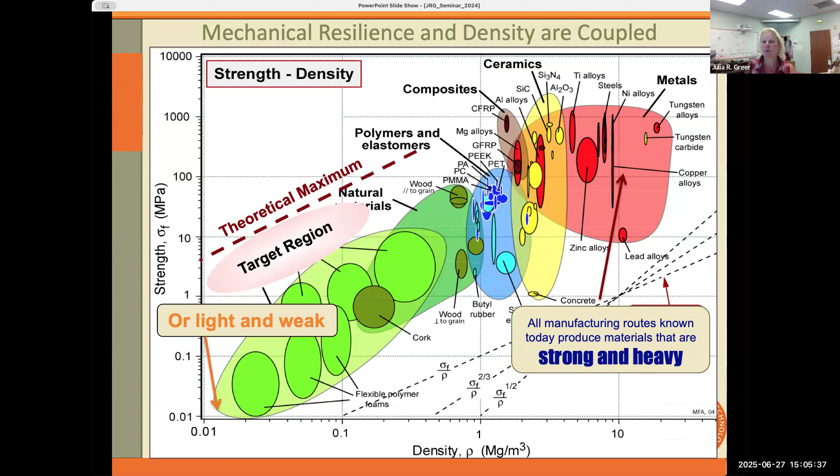Now, this is a log-log plot, so even a small change or small advancement within the space already represents a substantial change. So how do we get into that white space if everything we know how to make today is already represented here in these colorful domains?

What that tells us is that by properly structuring or architecting our material, we can get away with the same mechanical resilience without using quite as much material. And so this is where we started our research—I can't believe this was about 15 years ago now.

So it was the world's lightest material for about 3 weeks until the graphene aerogel guys blew us out of the water.

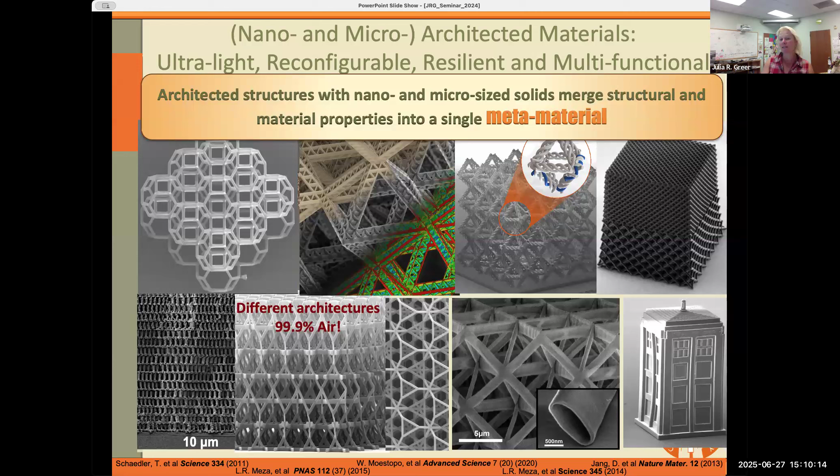So these materials embody every length scale from some nanometers to some hundreds of nanometers to microns, and maybe eventually to the macro scale. Because of that coupling at the nanoscale between the mechanics and the material properties, we call these metamaterials, because their properties can no longer be described fully by the mechanics perspective or the materials perspective.

What this plot shows us is that in their single crystalline form, all metals become stronger when you reduce their dimensions down to about 100 nanometers. So that tells us that gold or copper, something we know to be very malleable, becomes as strong as steel when you reduce their dimensions to the submicron level.

Now when I said in their single crystalline form, I don't mean that they don't contain any defects, I don't mean that they're pristine. What I mean is that they don't contain any grain boundaries. And now we have this power law scaling - of course, this is a log-log plot, right?

Now the size effect is more nuanced than that. If you look at the same metals like nickel, platinum, etc., and now you deposit them using a different technique - for example CVD or PVD or any kind of sputtering - in their thin film form, now they contain grain boundaries. And all of a sudden this effect is reversed, and now what you can see is that smaller is weaker. It's a more modest size effect - it's not plotted on a log-log plot, but it's non-negligible.

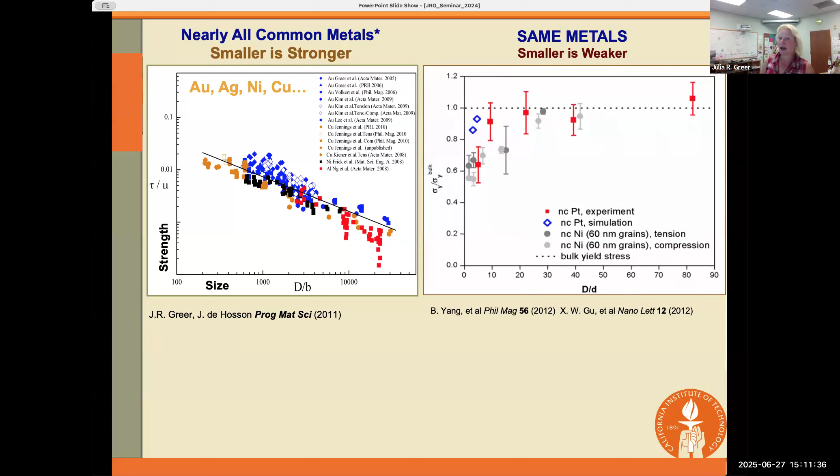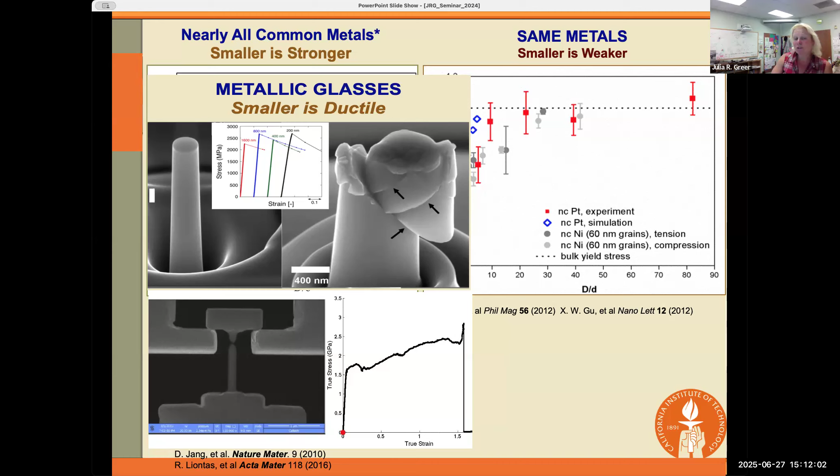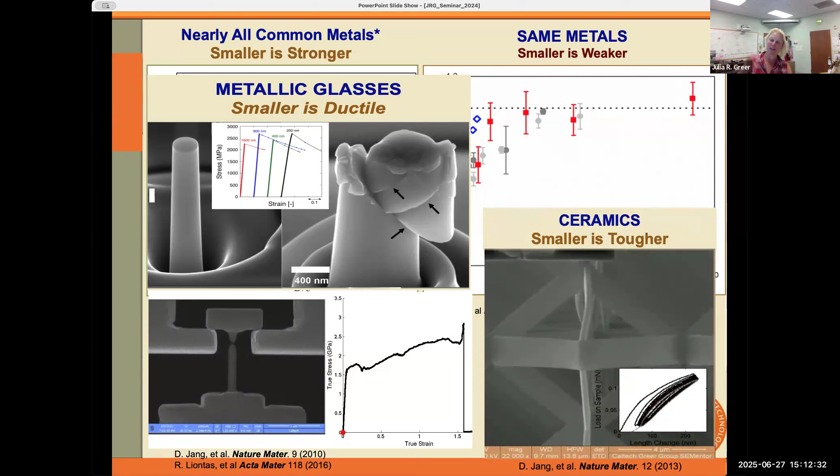If you were to calculate the tensile stress component within that beam, it's 1.7 gigapascals. Ceramics are not supposed to stay intact when they're being tensed with that much stress. So what this is teaching us is that sometimes materials can get stronger, sometimes they can get weaker, sometimes you can suppress brittle failure.

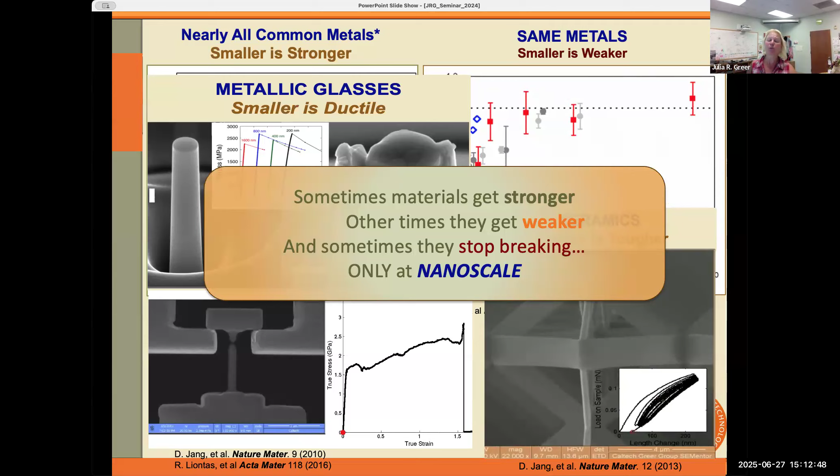But all of these phenomena occur only at the nanoscale. So the big question in our group was, can we harness all of these beneficial properties and then proliferate them onto larger materials with larger dimensions? For that, we are utilizing this concept of architecture.

The way we would proliferate these size effects is by utilizing three-dimensional lithography. This particular form of 3D printing or additive manufacturing is called two-photon lithography. The idea is that in a single laser pulse, there are exactly two photons released, and the constructive interference provides sufficient power to cross-link a photosensitive resin within a small volume, which we call a voxel. This voxel is rastered in three-dimensional space without a mask or any kind of light-based interference pattern, so that we can write a nano version of each one of you without any alignment or mask.

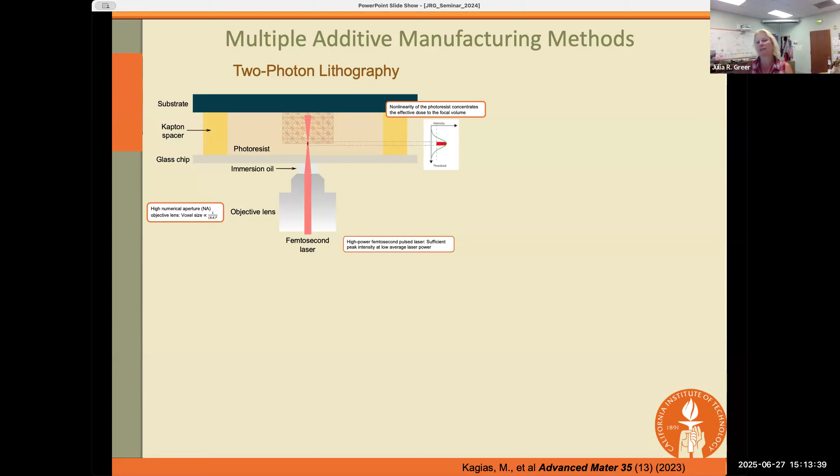So this technique allows for scalability and fast production of nano-architected materials, but you can no longer write arbitrary shapes. You can already see this trade-off: in the two-photon lithography world, complexity comes for free, but it takes some time.

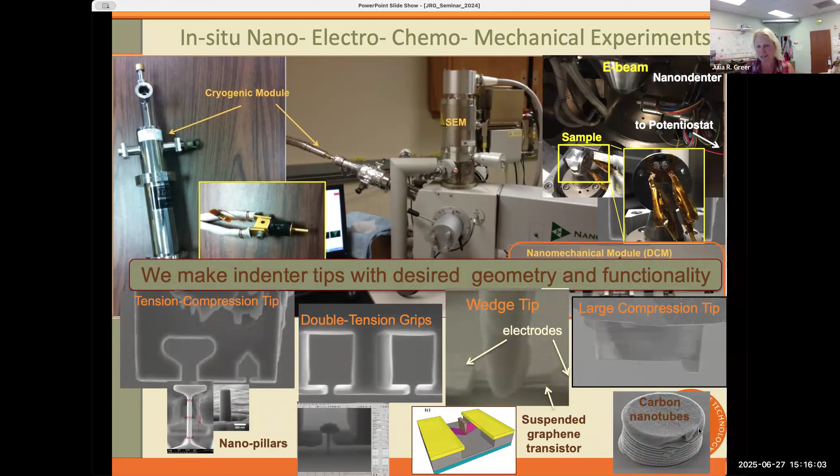Just to show you the broad range of length scales that we're able to probe: this sample, for example, is 100 nanometers in diameter, and we make our own grips that can pluck them while measuring the stress-strain response. These are carbon nanotube forests that can span hundreds of microns. So there's quite a bit of range that we can access and probe.

So let's get back to our hypothesis: can we utilize the size effect and proliferate it into materials with larger dimensions by utilizing this concept of architecture?

What I'm showing you here is an octet nanolattice made entirely out of alumina. Many of you are familiar with ALD, atomic layer deposition. When we talk to our friends who are the ALD experts, they said we can deposit conformally anything you want as long as it's alumina. So here's the alumina nanolattice. The wall thickness here is 50 nanometers, and it's very brittle—most of us know that alumina is a type of ceramic, and it's very brittle.

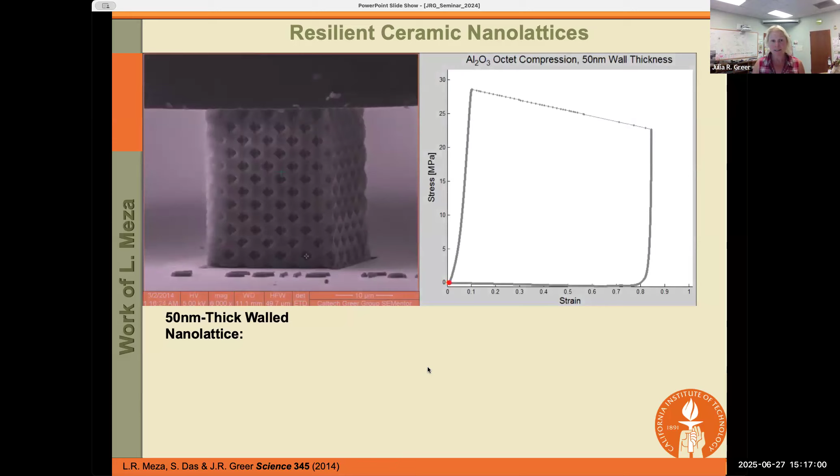Now its relative density is something like 1%, maybe less than 1%. So it's mostly air—think of your coffee mug with a severe case of osteoporosis. We know that when we apply pressure to something very porous and very brittle, it's going to collapse and certainly not recover. We have a nanoindenter in our instrument, and that's exactly what we're observing. So it crushes and dies.

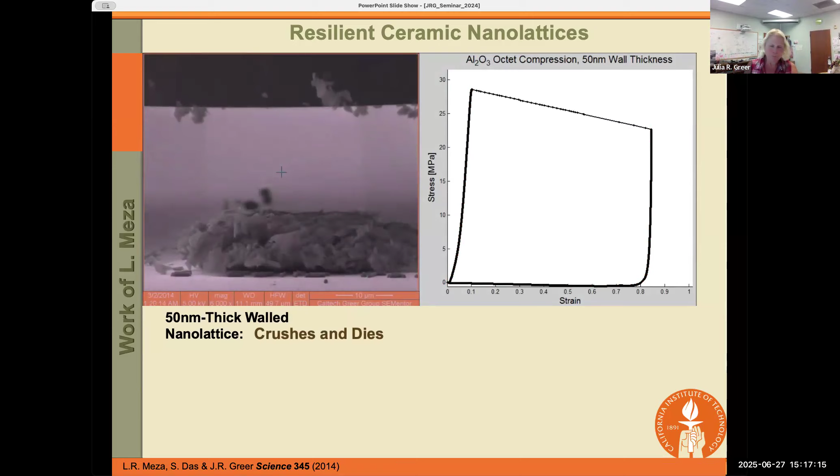Part of being at Caltech is that we don't really give up, so our student is pretty resilient as well. This is the work of my former student, Lucas, who repeated this experiment. But now the only difference is that the wall thickness is reduced by a factor of 5—so now these walls are not 50 nanometers thick, but 10 nanometers thick.

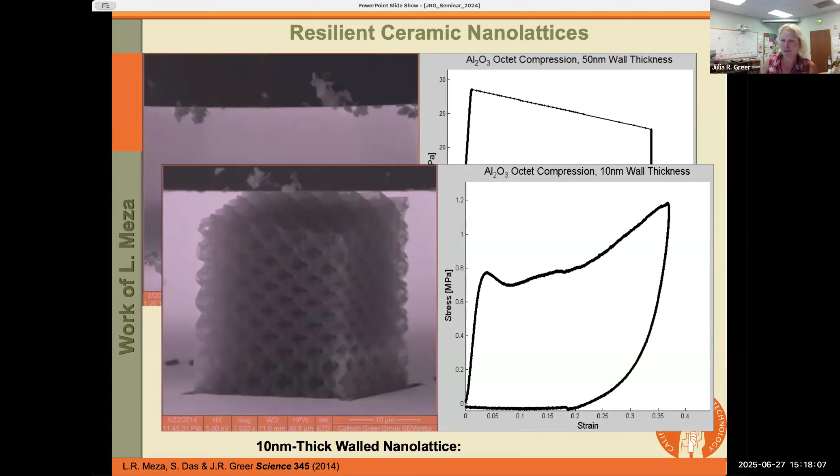If you were to just project based on what we saw in the previous experiment, it should crush and die even more readily, because the walls are even thinner, and it's more probable that this very brittle nanolattice is going to fail. So let's see what happens. What we're observing is that this very brittle, very ceramic nanolattice is compressed to almost 50% and then fully recovers. So if that doesn't convince you that there is in fact a size effect, there's no point in continuing with this seminar.

So this was the introduction to basically bring all of you into our world, where we're very interested in the nano-induced size effects in materials and how they can manifest themselves at larger scales. We've learned a lot since that point.

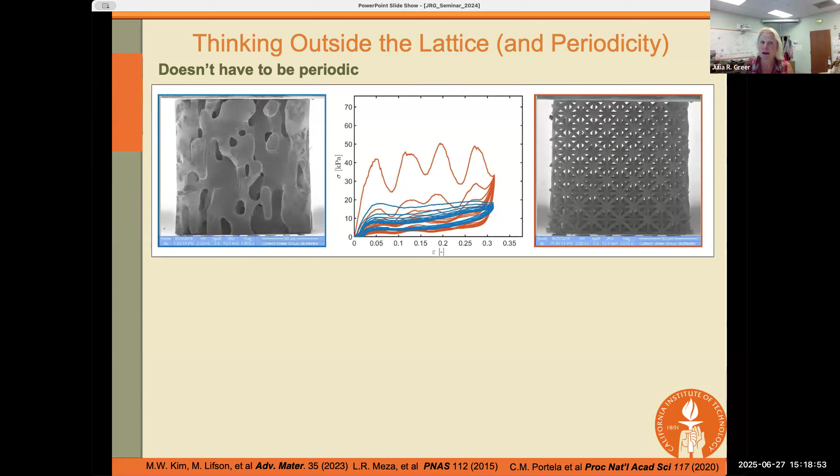One example here is that this recoverability of brittle nano-architected materials spans beyond the periodic architectures. On the left-hand side, it may look like trabecular bone to you, but this is not beam-based—it's entirely shell-based, entirely curved surface-based material, all made of alumina. You can see that this recoverability prevails over many, many cycles without any visible damage to the structure.

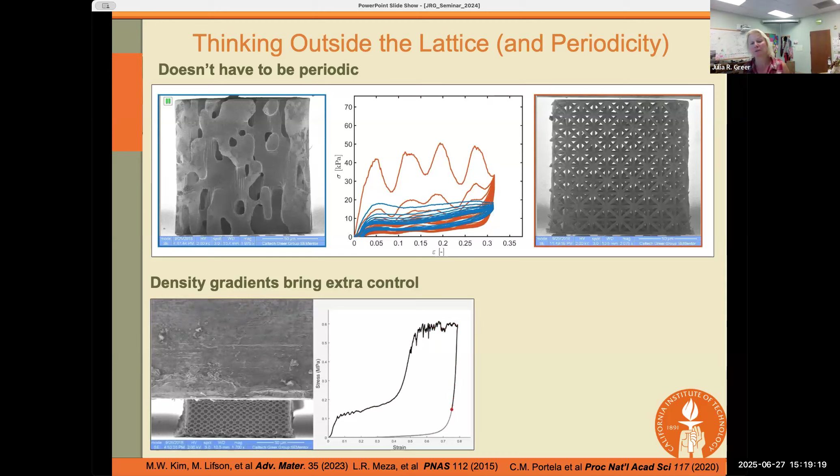We also observed that when you introduce density gradients into your design, like the case on the left here, you can see that the bottom portion, which is less dense and therefore more compliant, fully compresses and densifies before the top portion even realizes that it's being compressed. You can see that reflected in the stress-strain data as well as in the deformation behavior—these plateaus. That allows us to design materials where we can pre-build the trajectories of failure or the trajectories of deformation.

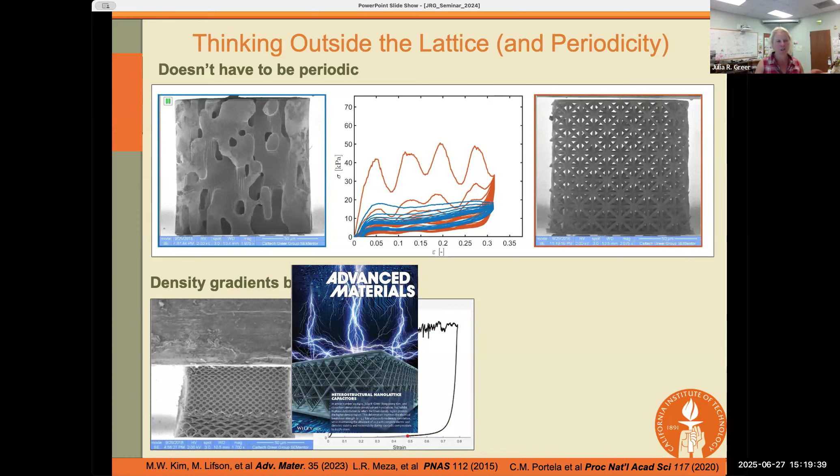Turns out that these gradient-type nanolattices are particularly efficient in supercapacitors, by how they create extra contact points if the breakdown voltage were to be attained. So there are many other side effects that seem to be useful.

And this is very important—these are all made of hollow elements. Now, of course, trying to understand why this happened, we call on mechanics, and one type of deformation that allows for this kind of recoverability is called shell buckling. Imagine your soda can, effectively—you basically create some wrinkles in the surface of the hollow cylinder, but then you have the ability to recover.

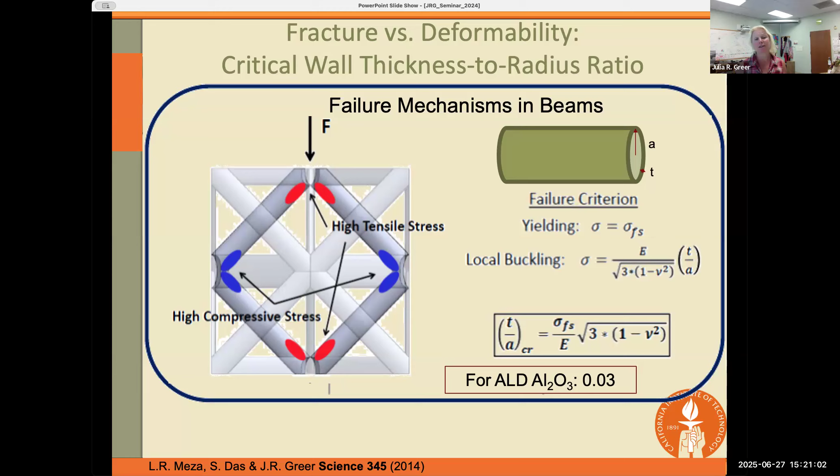When you perform this calculation, it turns out there's a critical t/a ratio—the ratio of the wall thickness to the radius—which for this particular material, the ALD alumina, turns out to be something like 0.03. So the idea is that if you're below that ratio, your structure is able to recover based on this shell buckling criterion, and above this ratio, your material will fail prior to the structural response.

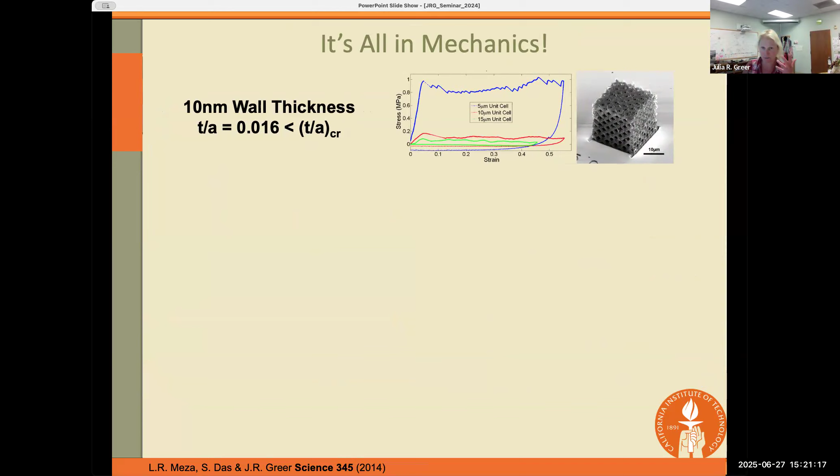So let's see what we're observing: for the 10 nanometer wall thickness materials, this ratio is 0.016, so it's below 0.03. You can see that every kind of sample recovered, and these different colors represent different sizes of the unit cell.

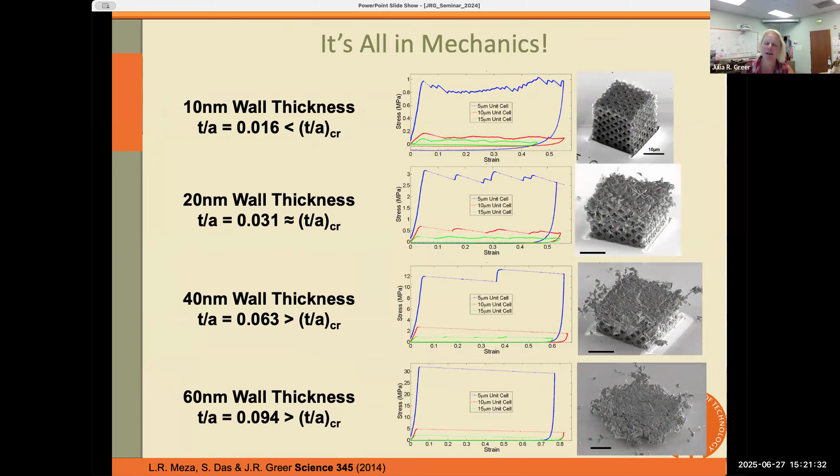As we increase the wall thickness, first we approach and then supersede the critical T/A ratio. You can see that the deformation becomes a lot more stochastic, a lot more catastrophic, and these nanolattices are no longer recovering at all. So it turns out that the answer lies in mechanics.

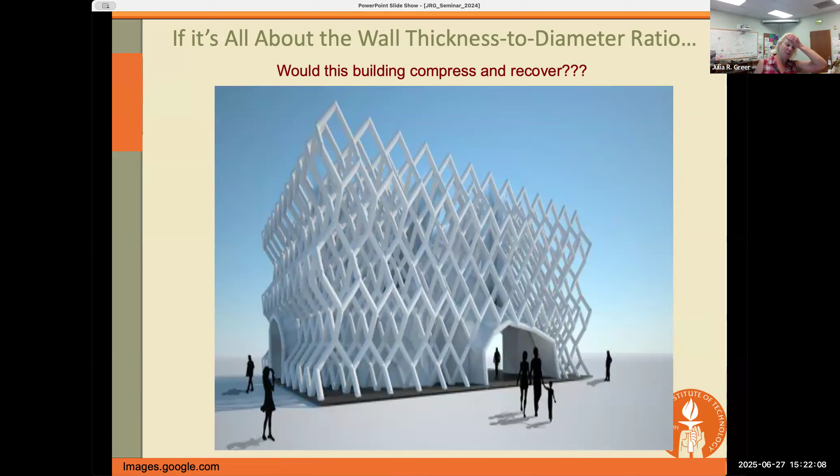If that were true, that means that if we were to construct a building where each wall is represented by 10 centimeter thick tubes, with a radius 3 meters wide, and the whole building spans multiple kilometers, we should observe the same response, right? If it turns out that everything is about the T/A ratio... well, hopefully you're all smiling, because of course this would never happen. If some giant came and stepped on this building, it would never recover. So the idea here is: why does this happen at the nanoscale, but not at the macro scale?

And of course, the answer lies in defects. We all know brittle materials fail at flaws, and the probability of finding a flaw—maybe thousands, hundreds of thousands of flaws—in something this large is 100%, whereas in something that's only nanometer sized, first of all, the size of the largest flaw is only 10 nanometers or whatever that thickness is. And the probability of finding a flaw is much, much lower.

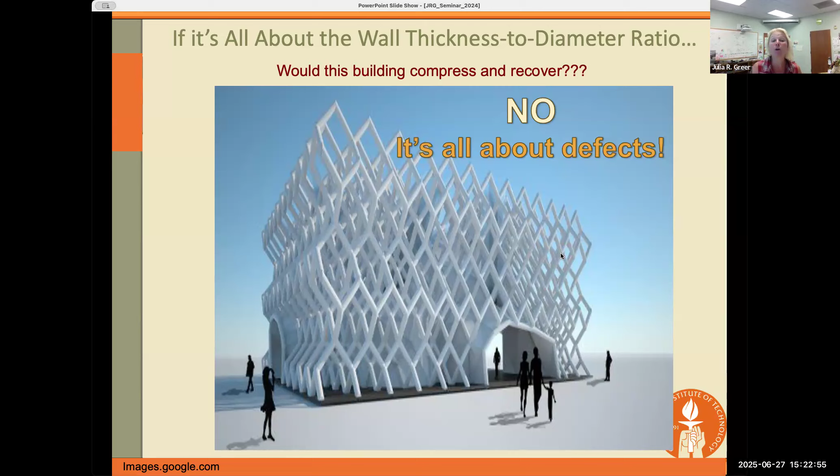So what this is teaching us is that if we were to fill up the same volume, like a room, with a nano-architected material versus just a regular fully dense material, we're going to get much better material properties in the nano-architected world.

So then the next natural question was: can we utilize this kind of approach in creating non-hollow structures? Because it's actually quite challenging to etch out the initial scaffold that was so painstakingly written. So we turned to carbon. Carbon is stiff, carbon is lightweight—carbon should be a perfect material to make monolithic-based nanoarchitectures.

So what I'm showing you here is a carbon micropillar. We all know we write with graphite, and we all know what happens when you push on the pencil too hard—of course it would crumple. So here's our pencil lead effectively, and we're compressing it.

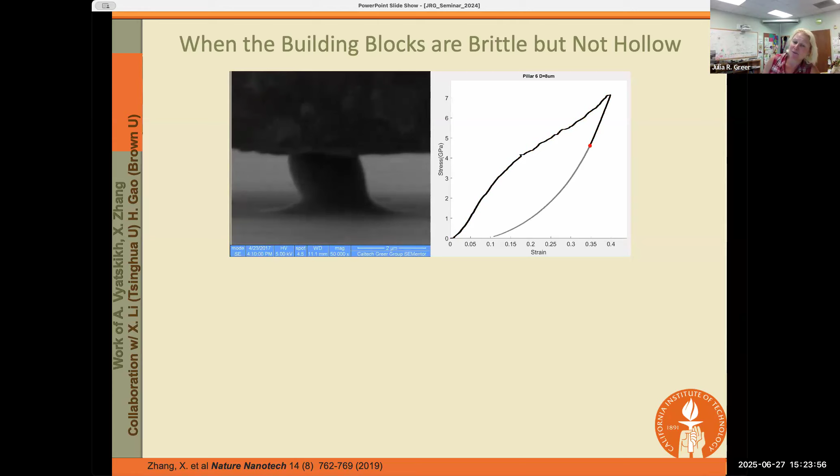And this is very interesting—we're already at a stress of 5 gigapascals. This is very, very high compressive stress. And what this is doing, it's bending—it's certainly not enjoying itself, but it is not fracturing. This is very counterintuitive, because we all know glassy carbon to be a very brittle material. So this is encouraging.

So we are learning that maybe the monolithic building blocks are still going to work. When we perform the microstructural analysis in the TEM, what we're observing is that what gives rise to this recoverability is the presence of graphene-like curved fragments that are sp2 hybridized carbon, and the local transformations within these localized regions are able to accommodate the globally applied axial strain.

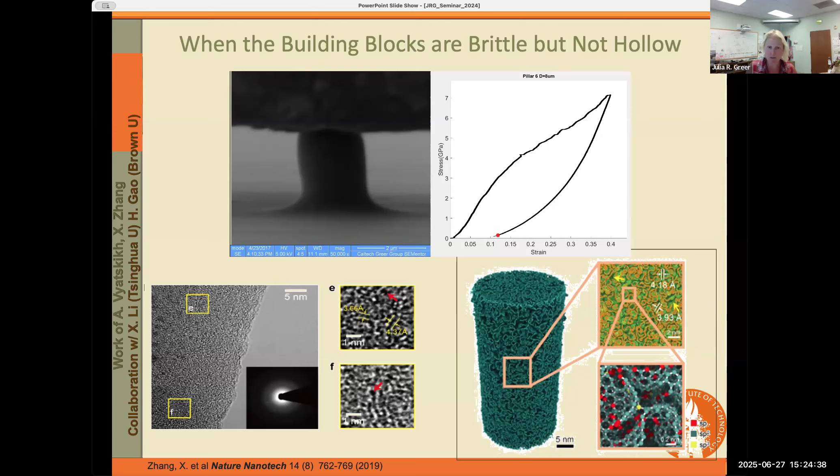We collaborated with a group at Tsinghua University that was able to model the same kind of microstructure using MD simulations. And sure enough, what they showed is that it's the coalescence of these so-called hotspots within the pillar structure that allows these localized deformations to accommodate the global straining.

All right, so here we are—we learned all about carbon that we needed to learn. At that time, we decided to architect with these carbon nanoscale building blocks, since we now knew that they were deformable.

So here, what we're learning is that even when the individual nanoscale building blocks are deformable, you can't just simply go and start architecting with them, because you're going to have to worry about the structural defects.

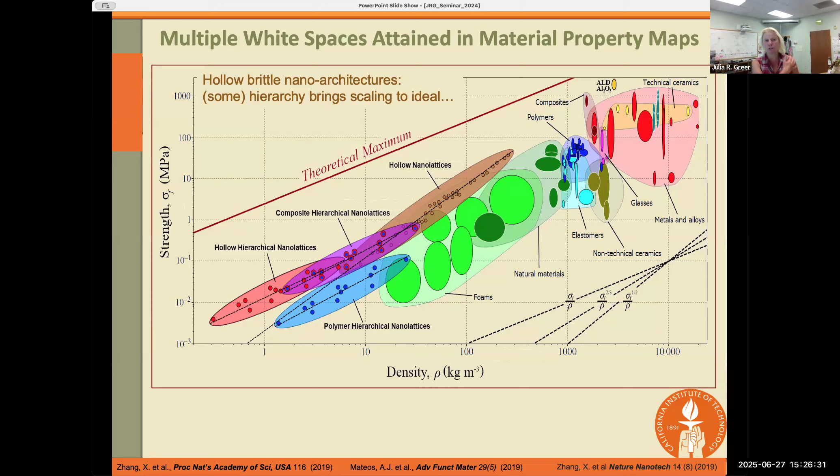You can see right away that, for example, the hierarchical nanolattices were able to buy us two extra orders of magnitude reduction in relative density. So there's plenty of potential, and certainly we and maybe many other groups can get much farther into the white space now.

We learned that in tension, the specific tensile strength of these alumina nanolattices supersedes that of, say, balsa wood, which is a material you would use for kayaks or any kind of lightweight sports equipment. So there's a lot of promise in that.

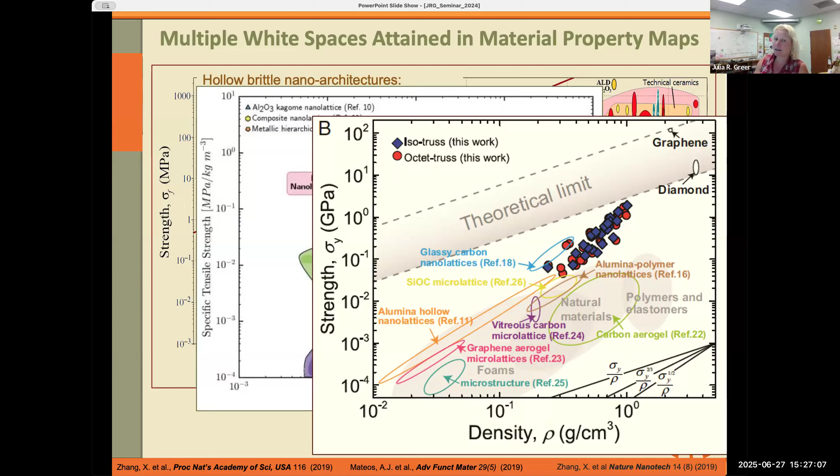We learned that carbon, the very brittle carbon that still didn't recover, turns out to have additional benefits. For example, it's the only material that gets close to the theoretical limit at the higher density regime. This is a very interesting finding, and I want to spend a little bit of time validating carbon.

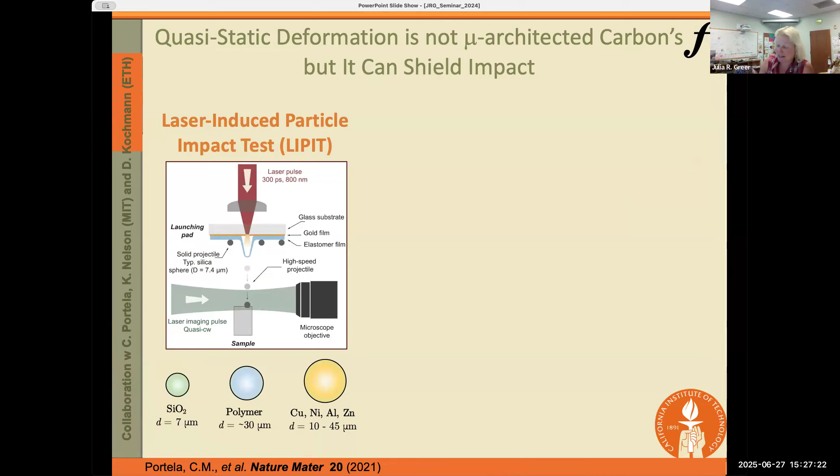It turns out we just weren't doing the right experiment. Quasi-static deformation is not microarchitected carbon's forte. So what my former student Carlos did is subject these carbon nanolattices to impact. These are high strain rate experiments called LIPIT - laser-induced particle impact testing.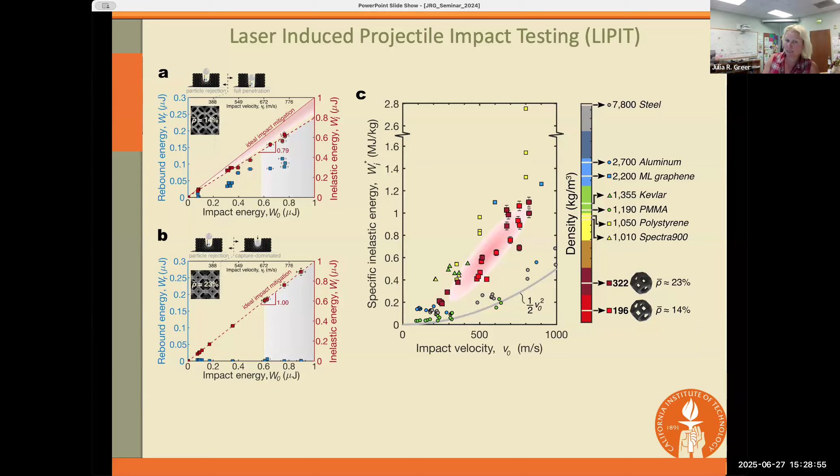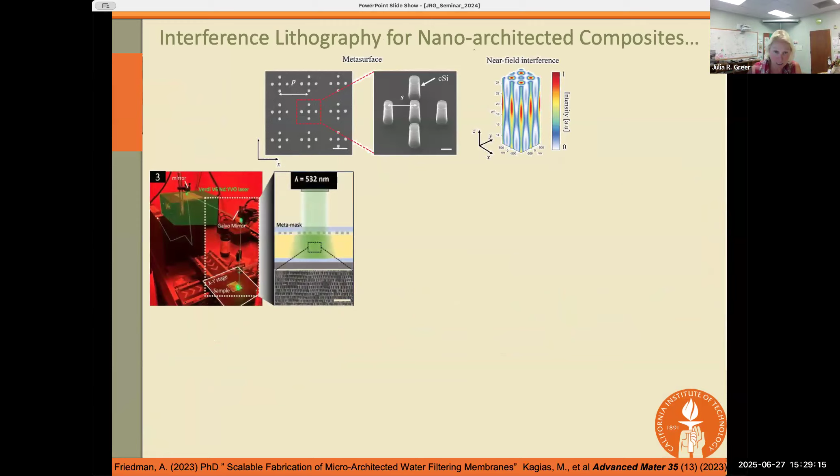I wanted to spend a few words on these energy absorption capabilities. We collaborated with my colleague Andrei Faraon's group here at Caltech, who created metasurface masks for us. Then we built a laser interference setup where, in a single exposure with a green laser, we're able to produce this entire nano-architected field, which you see here, along with this cross-section.

After we produced these nano-architected sheets, my student Kevin put them into composites. Layering these composites and interpenetrating these nano-architected layers allows us to further create a composite material, now utilizing these nano-architected layers as structural components.

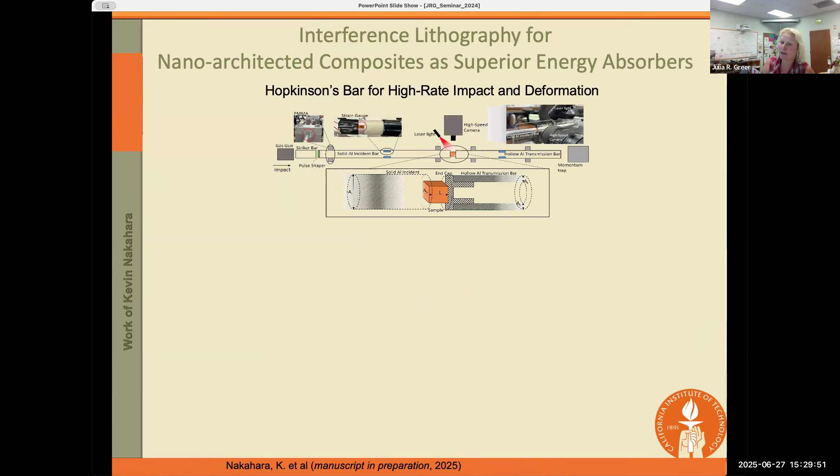After that, Kevin subjected them to a few experiments in the Hopkinson's bar - these are special high-rate experiments. What we're observing is that the layered composites, something we would expect like a layered cake, quite literally something we would expect to collapse in a layer-by-layer fashion and therefore offer greater energy absorption, doesn't actually offer that.

Instead, we're seeing much amplification in terms of energy absorption when the composite is interpenetrated. That now makes sense because we have this energy transfer mechanism and load redistribution mechanism available to us, when the nano-architected components are able to more efficiently redistribute the stress they're experiencing. This was a very important learning for us, showing how these nano-architected composites can be utilized in real personnel protection applications, for example.

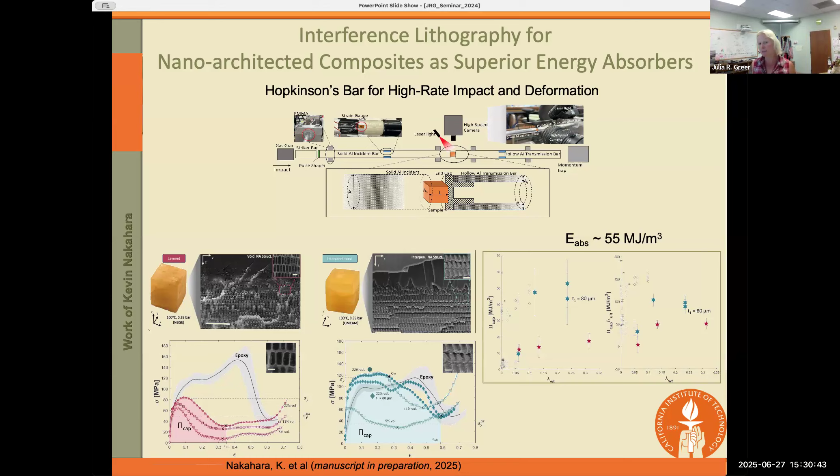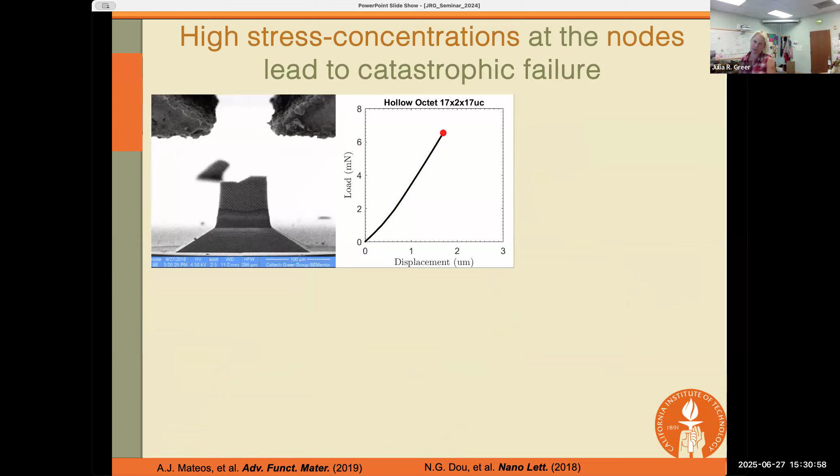So this is something that we're quite excited about. Spending just a little bit of time on tensile behavior, showing that the nodes in these nano-architected materials are one thing we really need to worry about. Like we saw failure in the carbon materials, same thing is true for the tensile experiments. You can see that almost every time we performed a fracture experiment, it fails at these nodal planes, and that's where the damage is accumulating.

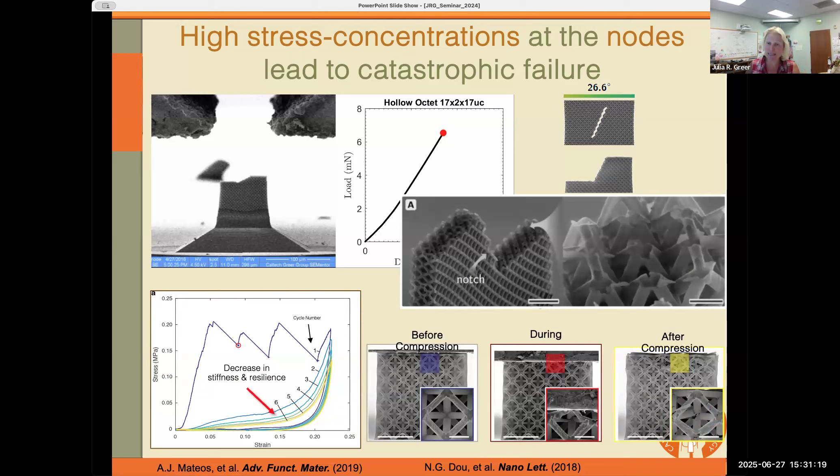This is true even in compression. And so what you see here is some of the damage that was built at the nodes in individual unit cells. So my former student, Weedy, decided to completely do away with the nodes.

He came up with these interwoven and woven nanolattices, where now none of the individual strands are contacting one another. You can see they're interwoven, and the only force that's holding them together is a force of friction.

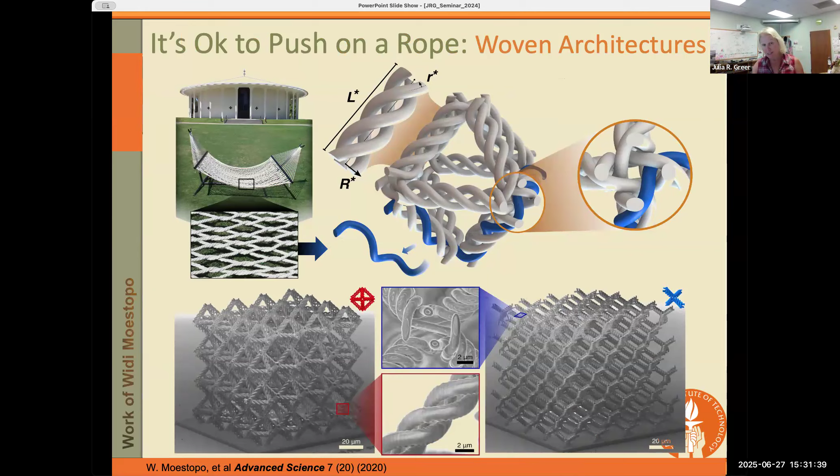So what we're showing you here is a side-by-side comparison of the tensile deformation of the woven nanolattice. You can see that on the left, it's very, very extendable. Well, of course, the regular nanolattice on the right broke. And because the original one didn't break, we can do the compression experiment on exactly the same specimen, which is not true for the specimen on the right. You can see it compressing, both of them compressing, and you can see how much more energy this material is able to absorb.

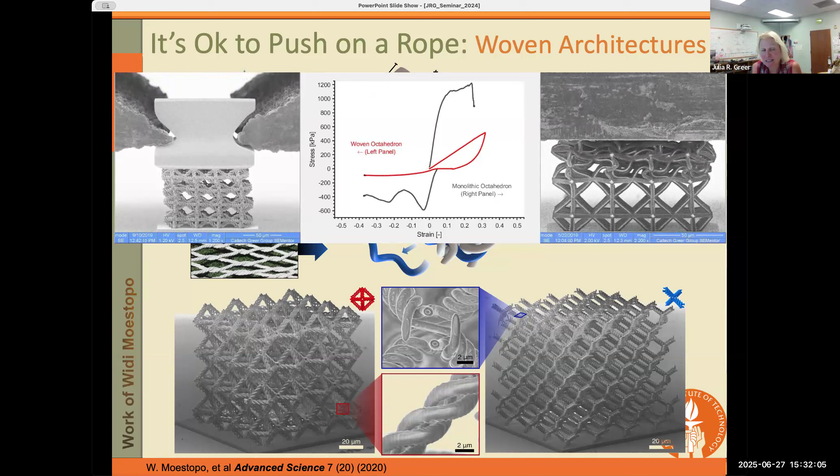So what we're learning is that the interwoven approach, where you do away with the nodes, which of course are the culprits for damage accumulation, lets you get to much greater strains and make much more compliant materials.

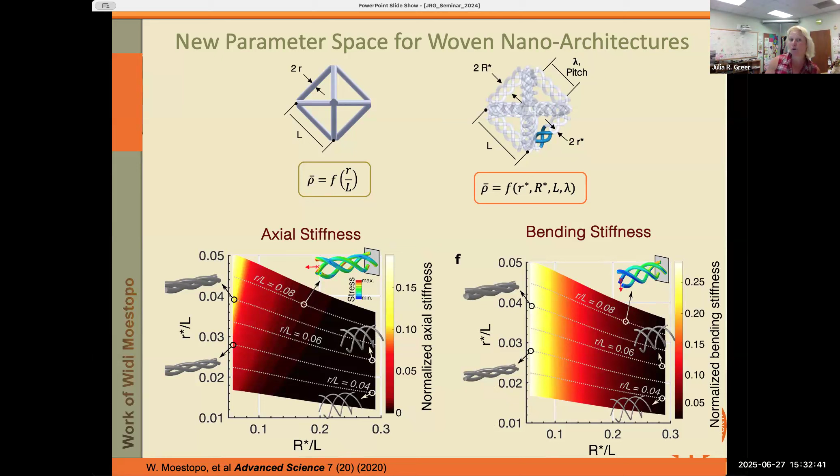Now, this is just to show you some of the modeling that shows us that what's really important here is the combination of R over L, the slenderness ratio of each individual strand that's effectively braided together, and the overall thickness of each interwoven beam. And so now we can really control the stiffness, the bending stiffness, and the axial stiffness.

Now, Widi took this one step further. He decided that instead of just focusing on the interwoven materials, he's also going to probe the knotted materials. This is my former student, Max, who loves rock climbing. You can see this is the standard figure 8 knot.

What Widi did is he created a knotted architecture where a single strand subtends the entire unit cell and comes out on the other end. And then the woven architecture where you still have the exit and entrance points at the top and at the bottom, but now it doesn't span the entire unit cell. So now watch what happens.

The knotted one is on the left, the interwoven one is on the right, and you can very clearly see that they first start deforming in exactly the same way. After that, the regular one just becomes very stiff because we're starting to strain it, whereas the nano-knotted one shifts into the friction-dominated regime where we're effectively working against the friction force and tying the knot.

So this taught us that at the nanoscale, we actually have a novel energy absorption mechanism available to us, specifically tying the nanoknots. And this was, you can see as the area under the curve, how much more energy we're able to absorb here.

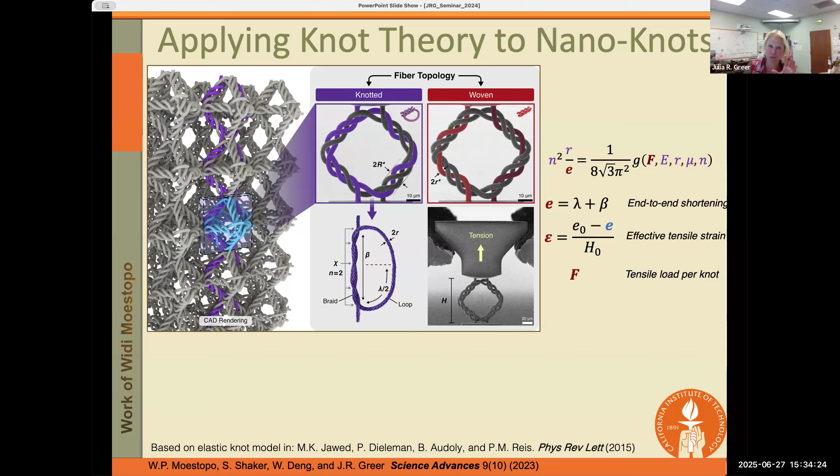So this is also another way that offers us, for example, the possibility to study friction at the nanoscale. The mu component here is the coefficient of friction, and I will challenge anyone who will tell me that the coefficient of friction or the friction behavior at the nanoscale is exactly the same as that at the macro scale. It's definitely something that needs to be taken into account once we start dealing with surface forces and surface chemistry. This is already some glimpse into that behavior.

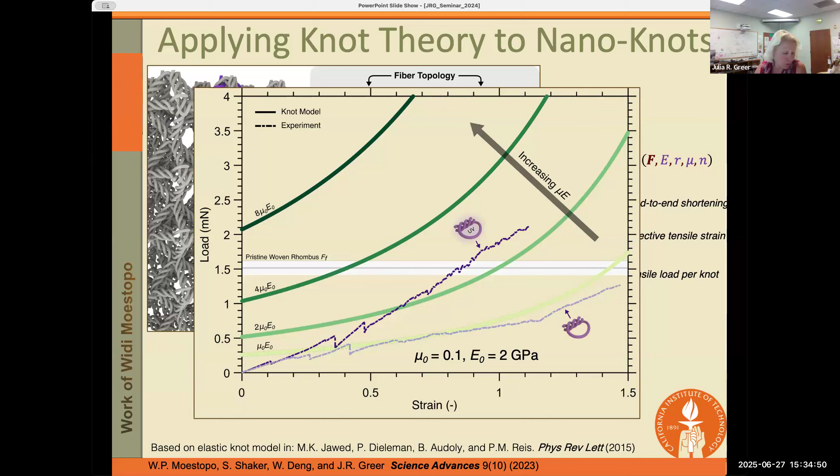So it turns out that the product of the coefficient of friction and the Young's modulus is actually what's important. So what we did is we treated the surfaces using different ways, for example, as-fabricated versus UV treated, and you can see that iso line actually shifting towards a higher mu times E. So this is a great opportunity to study friction at the nanoscale.

All right, and I have about 10 minutes left. So I'd like to shift a little bit more into the additive manufacturing world and show you what this enables us, what all of these seemingly mechanical pursuits have enabled us to accomplish in terms of additive manufacturing.

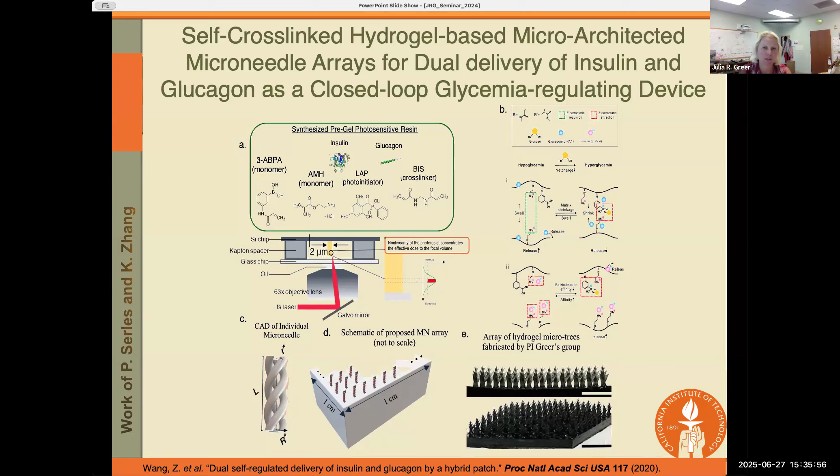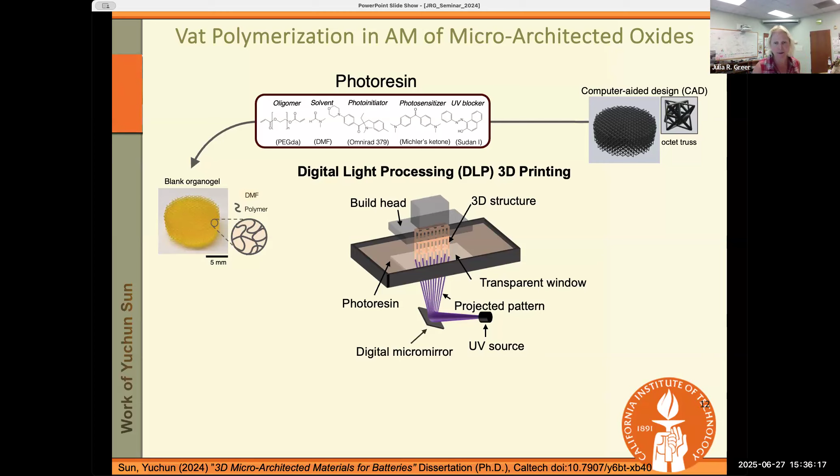I also wanted to show the application in energy storage. Here's our work showing how we make batteries using this approach. This is the work of my former student, Yuchun Sun, showing we can create cathode and anode materials. This project is micro-architected oxide, specifically lithium cobalt oxide, a cathode material. Yuchun made a blank organogel and infused it with metal salt solutions like lithium nitrate and cobalt nitrate. After thermal treatment and calcination, she produced the lithium cobalt oxide microlattice, which bears uncanny resemblance to the CAD design.

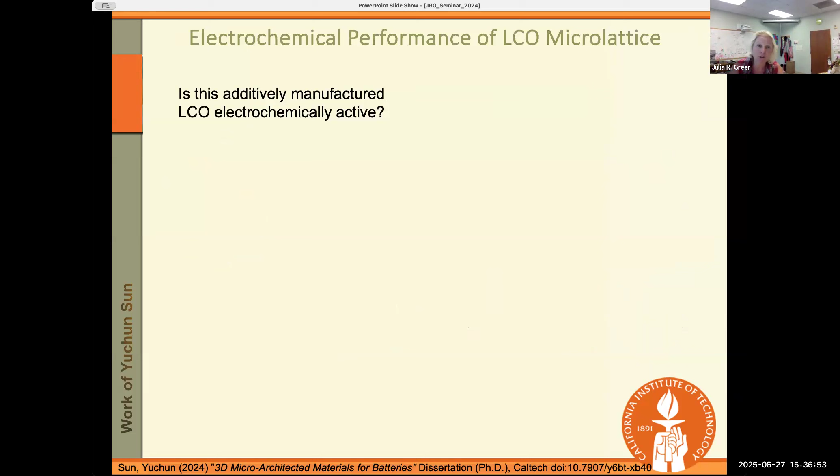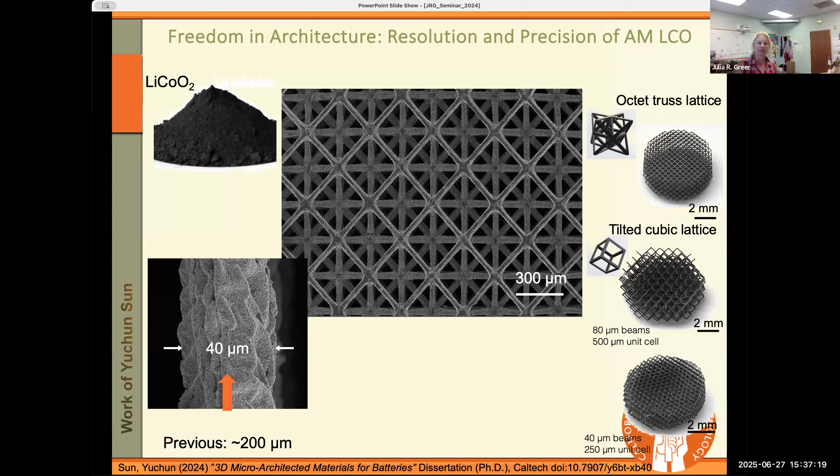You can see the SEM, the optical image, and the CAD-produced image overlaid on one another. Yuchun characterized this battery performance, and sure enough, this paves the way for more efficient solid-state batteries someday, and they're quite robust. She was also able to demonstrate that she can get to dimensions much smaller than previously reported - pushing down to about 40 microns and even below, whereas previous reports show hundreds of microns thickness, making it possible to create much smaller battery electrodes.

Yuchun also demonstrated that mechanical properties very much depend on how they were produced. This particular mechanical experiment shows engineering stress that's very low, about 50 kilopascals. In contrast, the same electrode treated at a different temperature and pressure shows more than an order of magnitude enhancement in mechanical resilience. So this post-writing thermal treatment is also very important.

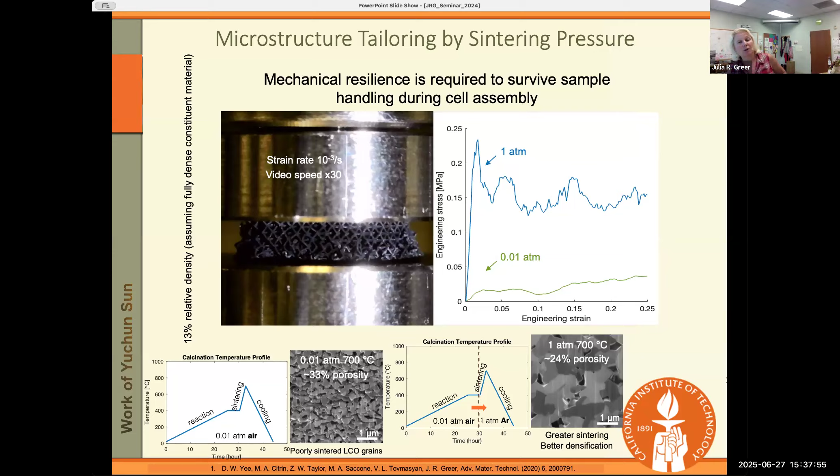We've been really interested in using machine learning in designing these architectures. I often get asked, how do you choose your architecture? Here's one way. It depends on what parameter you're trying to optimize for, and one of these parameters can be stiffness. We're showing a model with both a forward model and an inverse model that predicts the architecture to meet a particular stiffness goal. This is our collaboration with Professor Dennis Kochmann, who developed the model.

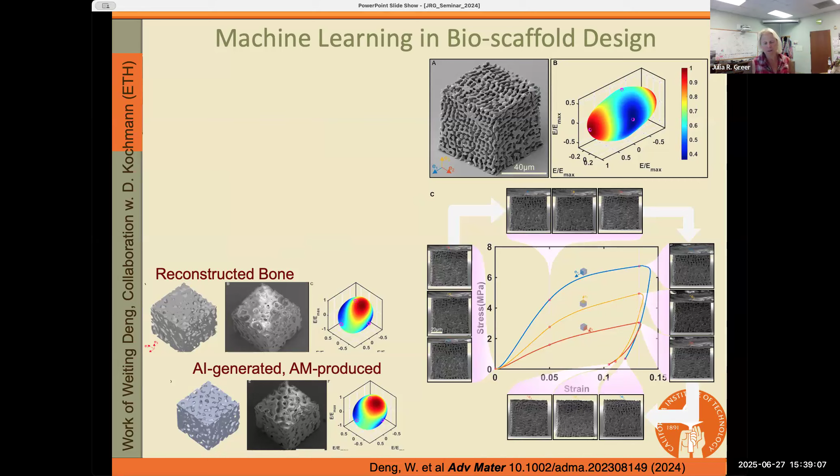My student reconstructed trabecular bone. What you see on the left is an actual tomography of trabecular bone. She was able to print both the reconstructed bone and the AI-generated sample, then measure their stiffnesses. What you're seeing here is real data showing they are, in fact, anisotropic - not something you could have easily predicted just by looking at the structure. In fact, most people looking at this structure would think it were isotropic. This was a really neat application of machine learning.

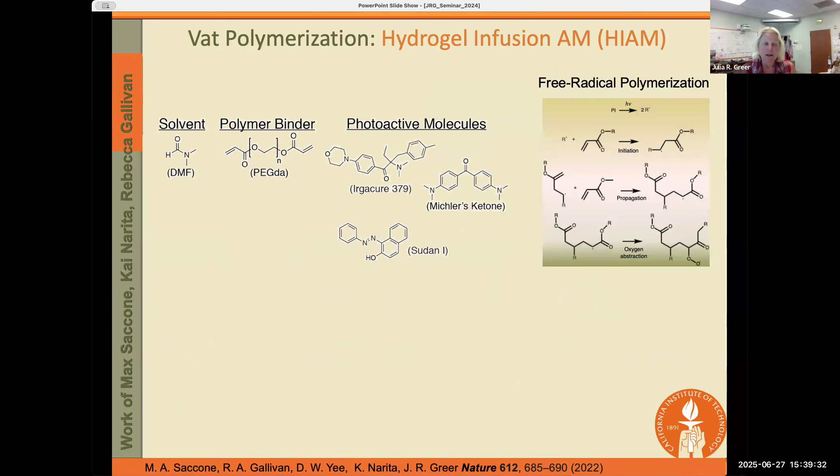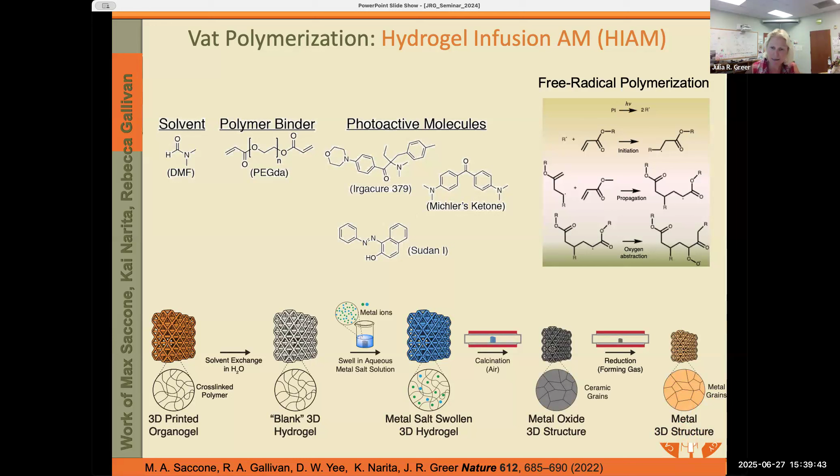I'd now like to introduce a particular additive manufacturing strategy we coined hydrogel infusion additive manufacturing. I already gave a hint to it when showing how we made the oxides. The idea is that if you have the right cocktail of photosensitive, photoactive molecules, then infuse metal salts into it, you get a hydrogel swollen with metal ions that's then subjected to thermal treatment, ultimately giving you the metal oxide and eventually the parent metal. This is the work of my former student, Max Saccone.

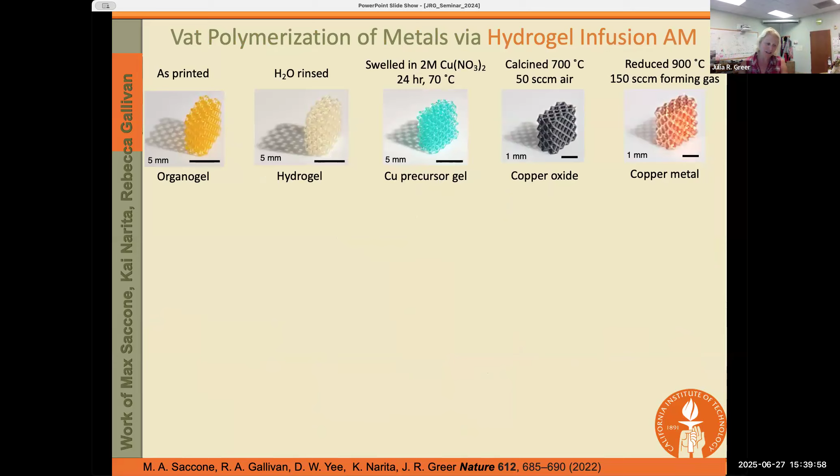And these are not computer-generated images. These are actual real images of samples that he created. You can see it's a very pretty project. He was able to make single component metals like silver and nickel, alloys like copper nickel, high entropy alloys like this multi-component alloy, as well as materials and metals that are very hard to form, like tungsten, for example.

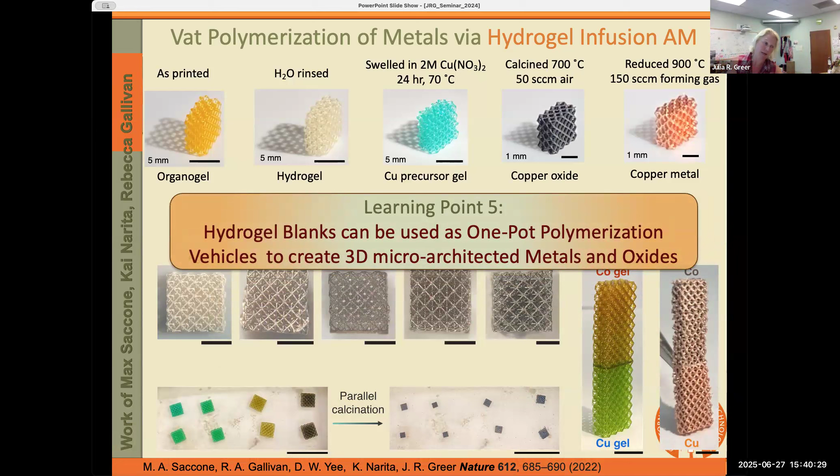So what we learned from that work was that one-pot vat polymerization offers a lucrative and very efficient way to create nano and micro-architected materials made of metals and metal oxides. There was an added bonus we didn't plan for, and this work just got accepted: it shows that the interesting kinetically driven microstructures formed in this process give rise to much greater strength. So what we're showing here, I know it's a busy plot, but the message is that these additively manufactured metals turn out to be a lot stronger than the same metals produced in a conventional classical way. We're basically bringing metallurgy to the 21st century by enabling this new approach to metal fabrication.

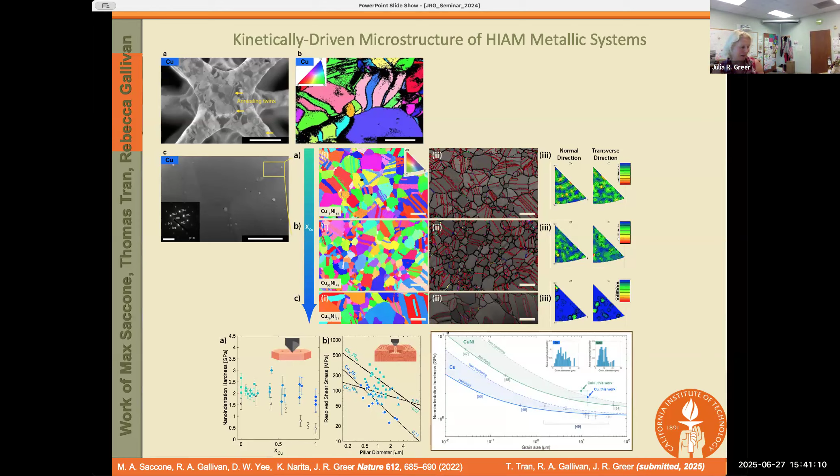Okay, this is just to show you that we can push this approach into the nanoscale, not just the microscale. And this is where, of course, we're using 2-photon lithography. It's a slightly different cocktail, and my former student Wenxin was able to still infuse it with metal-containing salts. We were able to get these tiny 200 nanometer nickel nanopillars. You can see that they have every kind of microstructural feature in them. These are TEM images that show the cross sections, and you can see they're nanocrystalline, nanoporous, very interesting.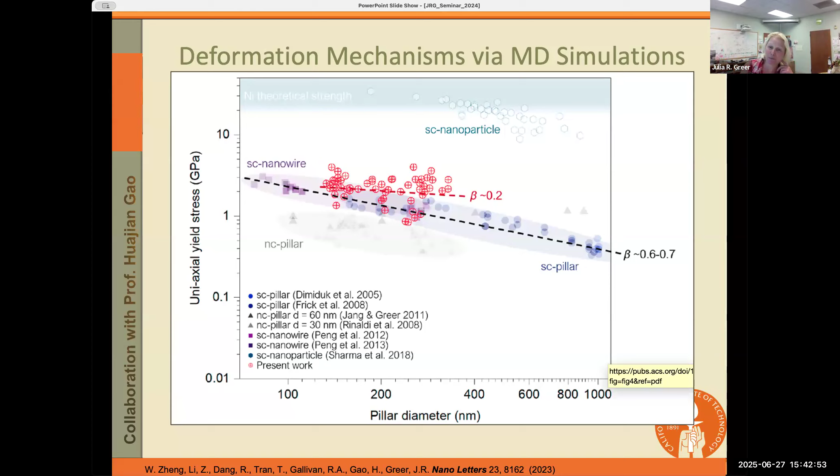I'd like to pause here because there have been people working for two decades now, since 2005 or so, in this field. Everybody's understanding was that nano-sized metals always exhibit the smaller-stronger size effect if they're single crystals, or smaller-weaker size effect if they're nanocrystalline. So what we're learning here is that you can actually fully suppress the size effect by the right composition of nanocrystallinity and pore distribution. So the size effect is something that not only can be tuned, but can also be suppressed. This was an interesting observation for us.

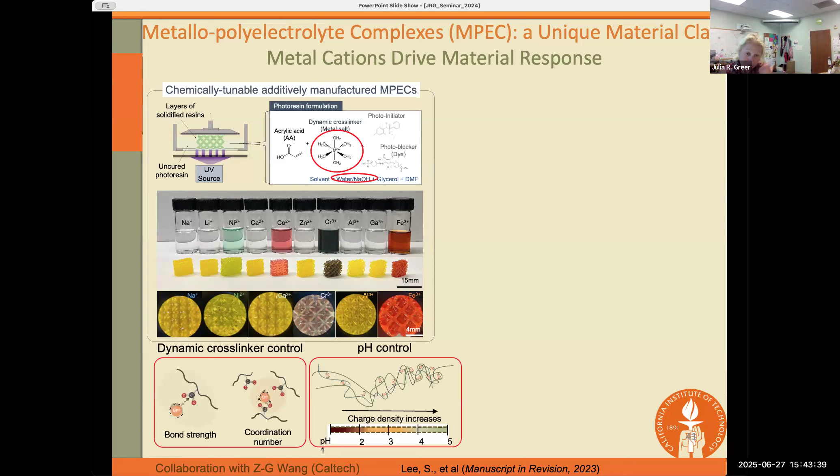Okay, and for the last few minutes, I wanted to share some of the non-metal work with you. We've been very interested in soft materials as well. This project was conducted by my former student Seola, who effectively used these so-called metal polyelectrolyte complexes to 3D print hydrogels with different metal ions infused into them. She didn't thermally treat them afterward to convert them into anything. Instead, she utilized this concept of dynamic cross-linking, where the bonds formed between the metal ion and the polymer backbone are non-covalent. The formation and dissociation of these bonds, as well as the local pH environment, gives this very intimate coupling between chemistry and the mechanics of these materials.

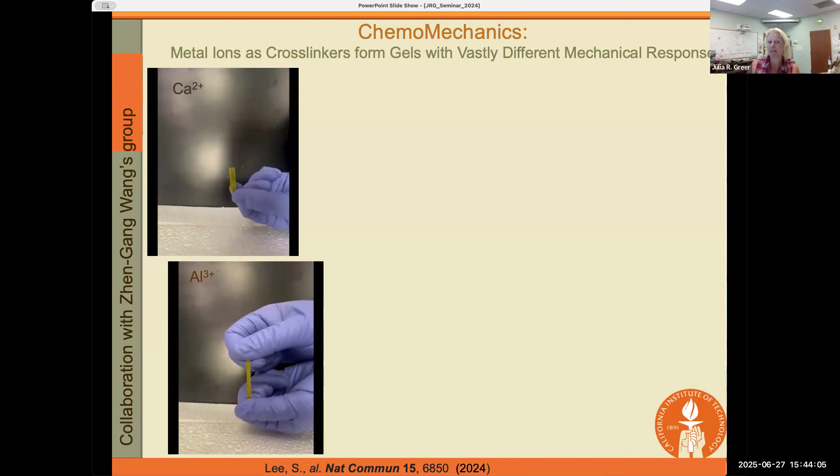I'm going to show you these two videos. The one on top is infused with calcium, which is a divalent metal, and the one on the bottom is infused with aluminum, which is a trivalent metal. You can see from this highly technical experiment that the aluminum one is very stiff and not very stretchy. The calcium one, again the same resin, the same polymer resin, but infused with a different metal ion, is very stretchy. Now, in more technical terms, we compared the divalent to the trivalent to the monovalent response, and you can very clearly see that that's a key parameter that makes a huge difference in the mechanical response.

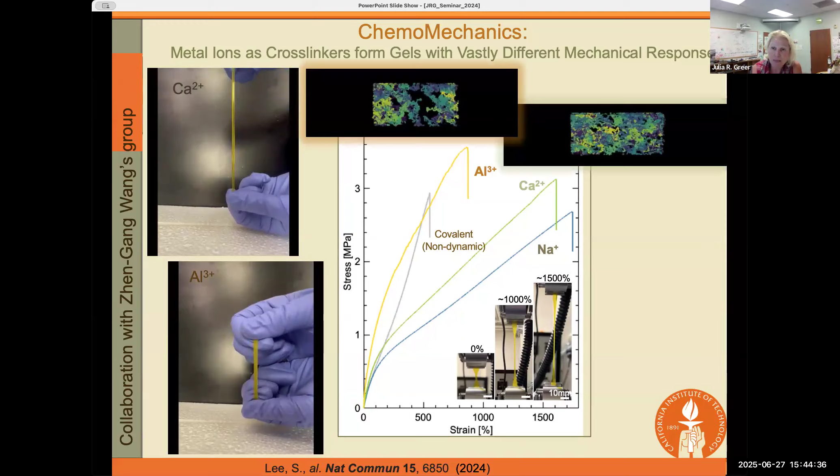Now, the bottom x-axis label is not a mistake—it is, in fact, 1000% strain. So you can see that these materials are extremely stretchy and can be made extremely stiff, as is the case in the aluminum. We collaborated with a theory group in chemistry at Caltech, and they're able to explain this behavior. The trivalent metals tend to coordinate in clusters, which makes them stiffer and more susceptible to fracture, but at much higher stresses. Whereas the divalent metals only coordinate in two different places, enabling them to slide past one another, giving rise to the stretchability and tremendous extensibility.

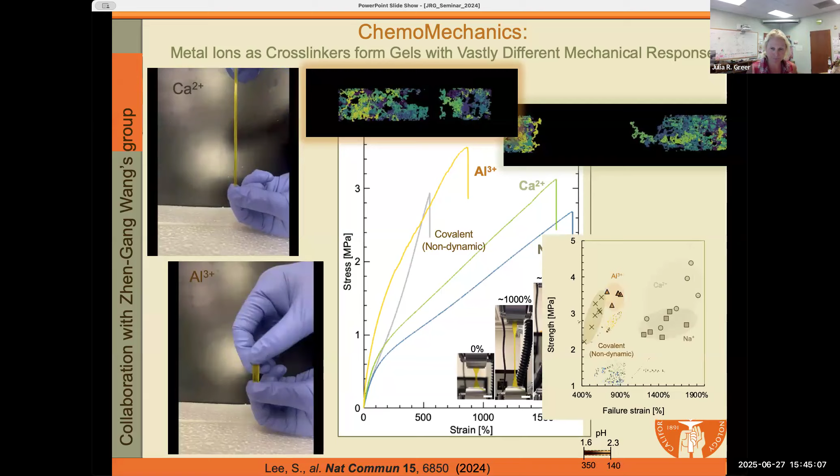This is just to show you that depending on the pH, we can see phase separation versus homogeneous phase formation, so it's a true representation of chemomechanics. You can see the profile of the two different phases, the polymer phase and the water phase. These are hydrated gels, of course, and this is something that can be used for biomedical applications.

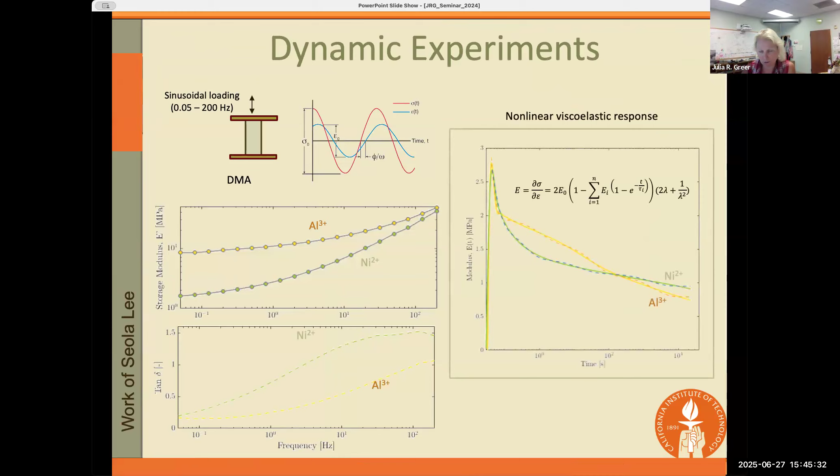And the last thing I'd like to share with you is that, with some mechanical modeling, and recognizing that these hydrogels infused with different metal ions have different time constants, we're able to really control their reconfigurability.

This gives us a degree of tunability and responsiveness in these kinds of MPEC materials, which already represent a pretty unique set of materials. This is just to show you that if we program the shape—for example, a blooming flower—here's the calcium versus aluminum comparison. We place them into the pre-programmed shape, and you can see they're both blooming back to the initial shape, but the rate at which they're blooming is very different between the two. So you can start thinking about how to make actuators and active materials using this approach.

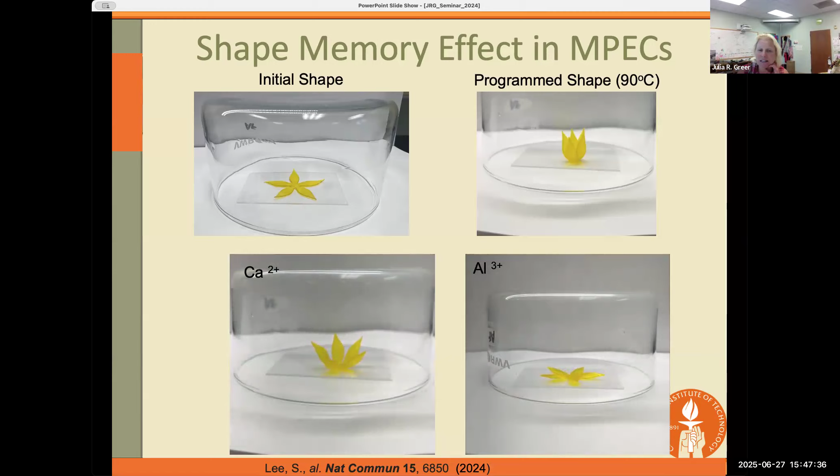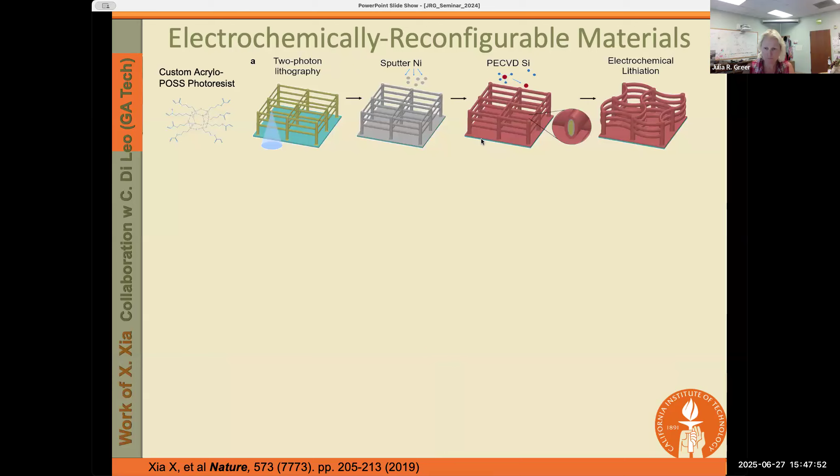All right, so now we're getting to the end of this presentation, and this is a very relevant video, near and dear to my heart. I think basically the question is, well, so what, right? You showed us all these interesting phenomena, hopefully you found them interesting, all these fun videos and phenomena—so what? What's the big deal?

The message I'd like to leave you with is that if you're careful with tuning three critical parameters—one is material architecture. Are you building something with a closed cell or open cell type of architecture? Are you interested in energy absorption? Are you interested in catalysis? Are you interested in electrochemical response, maybe microelectronics response? All of that is intimately governed by the architecture of what you're making.

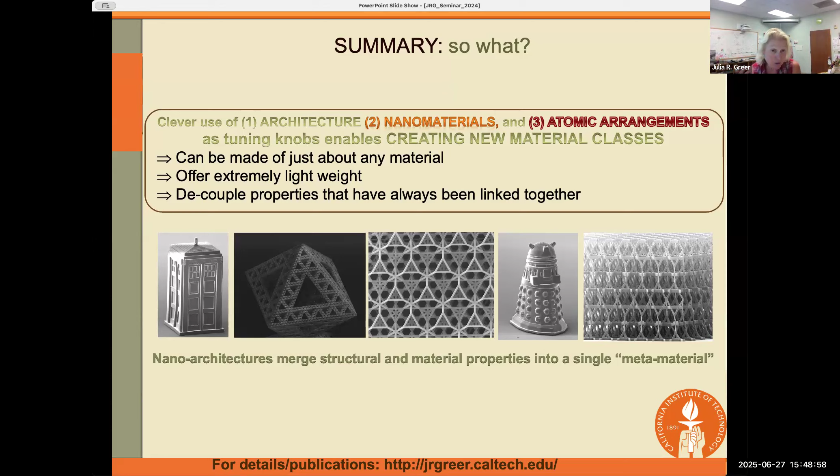The second parameter is the nano size effect. Every class of materials exhibits a size effect, but that transition length scale is not the same for every class of materials. The third one is the atomic level microstructure—is your material amorphous, crystalline, nanocrystalline, etc.? Understanding the combination of these three for each material class will enable us to create entirely new classes of materials.

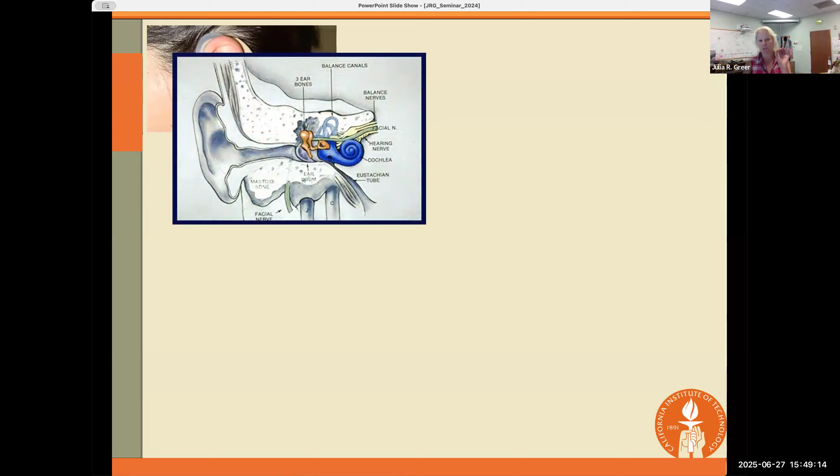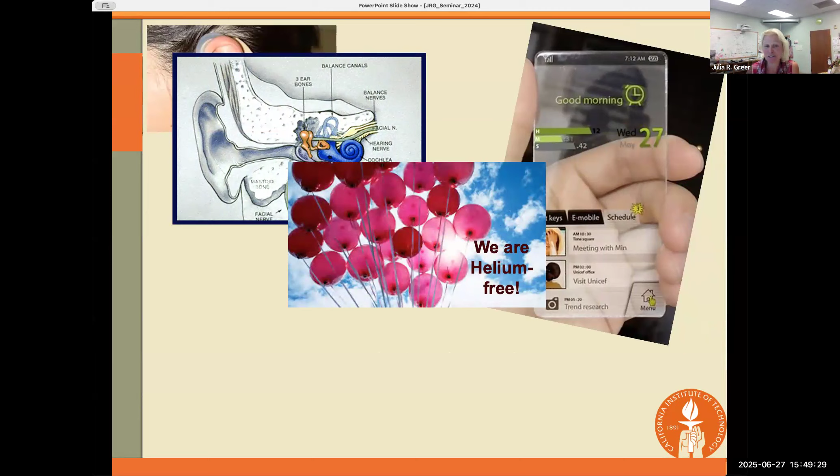For example, we can live in a world where there will be no hearing aids because we'll be able to write the cochlea bone directly, populate cells onto it, and simply insert it in the ear. Your iPhone 83 won't need to be recharged for about a year on a single charge. Our balloons won't need helium because these are very lightweight, stiff materials, so we can just evacuate them. Vacuum is lighter than air.

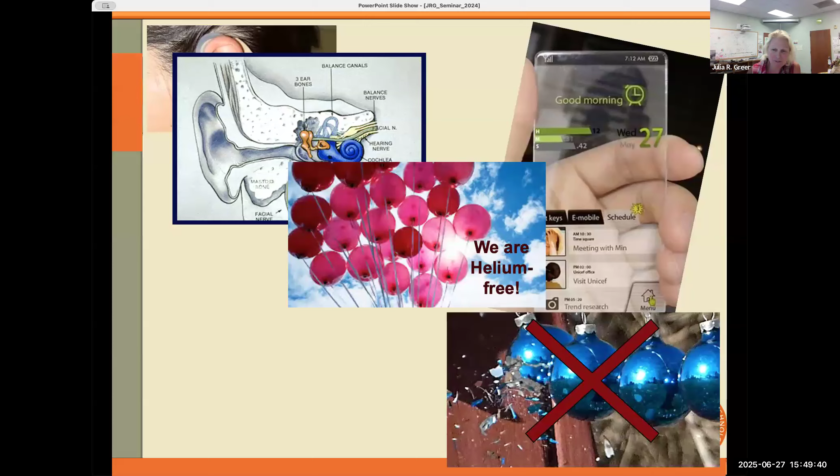And so with that, a big thank you to you, a big thank you to my group and all the funding sources.

I'm sorry, Julia, I didn't mean to kick you out. What I meant to do was control the screen sharing so that only the host and co-host could share, to prevent any more incidents. I thought you were a co-host, so I thought you were going to stay up here. Do you want me to? I mean, I'm not really sharing anything other than my lovely group. Sharing is not turned on. Let me see if I can fix that. Sorry about that. No worries, no worries.

Please, let me go ahead and say thank you, Julia. That was a fascinating talk, I really learned a lot. A lot of questions come to my mind, we're going to try to take questions as well. We'll take audio questions only.

But let me start. I was intrigued by a lot of it, but the knot tying aspect I found fascinating. Has mathematical topological theory been applied yet to that? Because there might be some opportunity there for new structures based on topology.

You mean topological insulator, those kinds of effects? Yes, we'd love to do that. I think they're still a little bit big — for us to see these kinds of effects, we're going to have to get down to maybe 10 nanometers and below. So we would very much welcome that kind of research, and we've tried. We've had some discussions with folks in physics here who work on topological insulators. Once we're able to make these architectures at the 10 nanometer level out of semiconductor materials, I think there's a very clear pathway for how we can study them. So that's definitely something very interesting and very worthwhile.